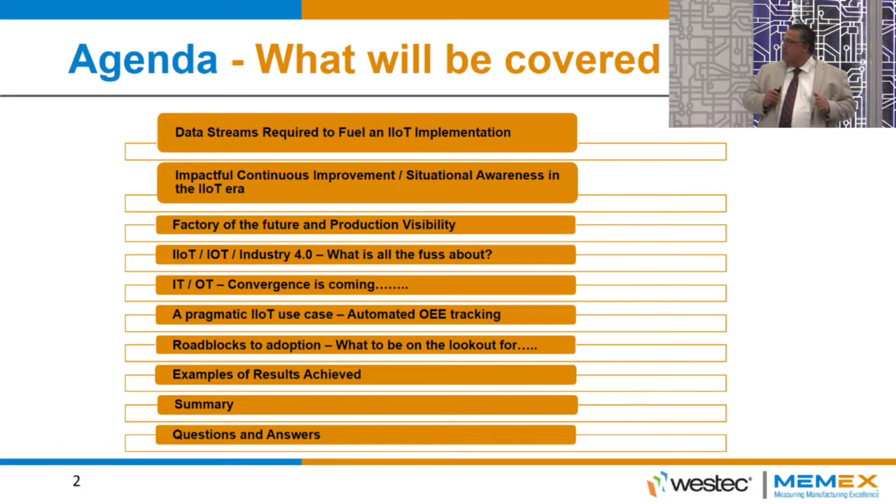This is what we're going to cover today. We're going to cover data streams required to fuel an IIoT implementation. We're going to cover impactful continuous improvement. We're going to talk about the factory of the future, IoT, what's all the fuss about, some convergence between IT and OT that has to happen. We're going to talk about some pragmatic use cases, automated OEE tracking, roadblocks to adoption, some examples of benefits, a summary, and then the Q&A at the end. So with that, let's get started.

So data streams required to fuel an IoT implementation. So the drive towards connectivity. None of this happens without having our assets on our factory floor connected. Okay, we need to pull the data out. We're big proponents of MTConnect. For those of you that saw Neil's presentation, he went into a great amount of detail. I'm not going to do that. Just suffice to say that we're huge supporters of MTConnect and have been since 2010.

So we have a product called the AX760, and it essentially turns that machine into a web server and speaks MTConnect. So it's essentially an Ethernet connectivity device, and it will go into machines that presently, in most cases, don't have an Ethernet connection, or if they do, they speak some proprietary protocol. So it saves us a lot of time and effort, and it actually lowers the barrier to entry for our customers.

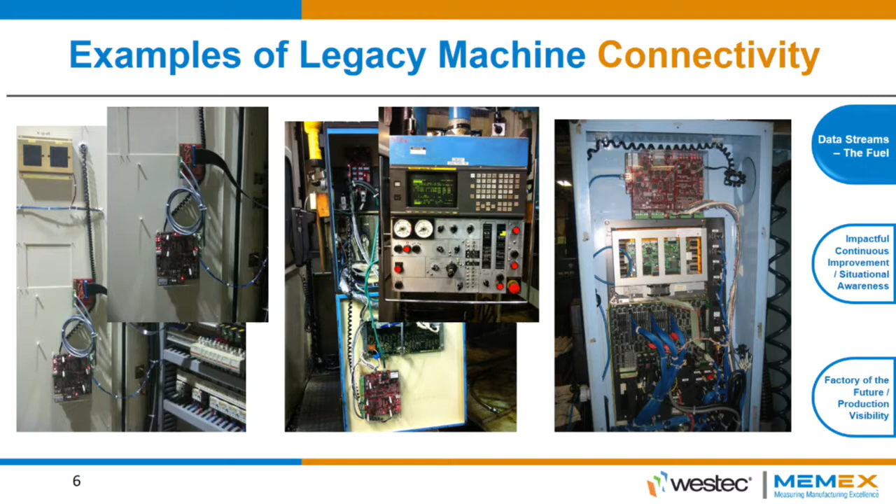So when we look at the data required to fuel an IoT implementation, there's really the confluence of three data streams. So we have data from the operator. This is an often overlooked but very important data stream, because the operator is essentially an important piece of the puzzle with respect to the productivity of the factory. The operator can influence the productivity of the factory.

It also can improve the productivity of the factory by giving us information that we currently don't have, like the machine's not running, and it's not running because the operator doesn't have the tooling to run it, or doesn't have the dunnage to put the finished parts in, or things of that nature. We can take that data back. We can actually fuel our continuous improvement initiatives with real-time data.

The second piece of data that's important is our business system data integration. So we want to be able to take the production schedule to and from ERP, take the production schedule from ERP, drive it down on the factory floor, have the operational management team use that schedule, and that schedule can change many times over the course of a day in some cases, but also be able to feed that data back up into ERP to do things like drive inventory and procurement directly.

So essentially what we have is a shop floor to top floor communications loop that's all done in real time without human intervention. And the third one we talked about was the machine data.

If we don't have these, our traditional approach, which is operator-centric all by itself, we get essentially reactive information, but we're generating lagging metrics. So our metrics are not in real time. An example of that would be companies that write, I was down for 10 minutes in setup, and I was down for 15 minutes in feed hold or whatever, and then aggregating that into a spreadsheet and firing it out to management the next day. That's a real lagging metric. We're having a production meeting the next day about something that happened yesterday.

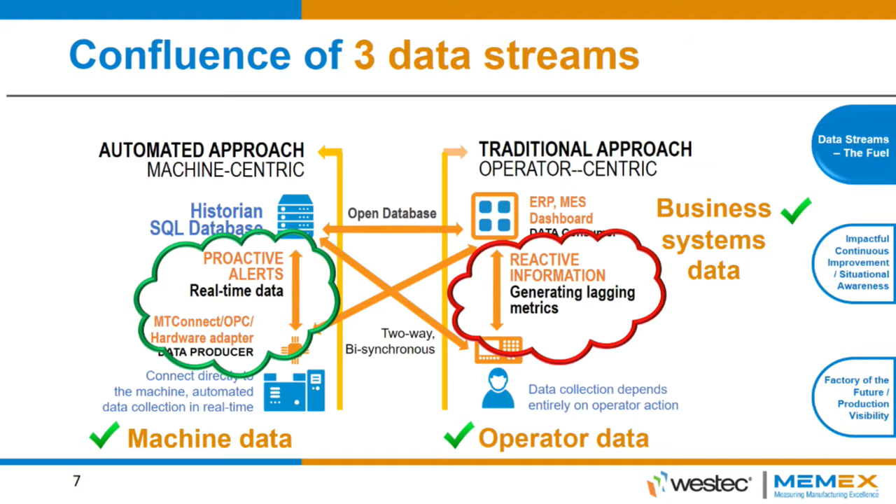When you look at what happens in most manufacturing plants, three things constantly change: people, product, and equipment. And so any one of those three variables can actually upset that productivity number from the previous day, and the cycle repeats itself every other day. So when we have real-time information, we can do things like proactive alerts. We can actually see what's going on in real time. We can action on that data. We can bring resources forward to solve a particular issue. We can drive our continuous improvement initiatives, which I'll get to in a future section here.

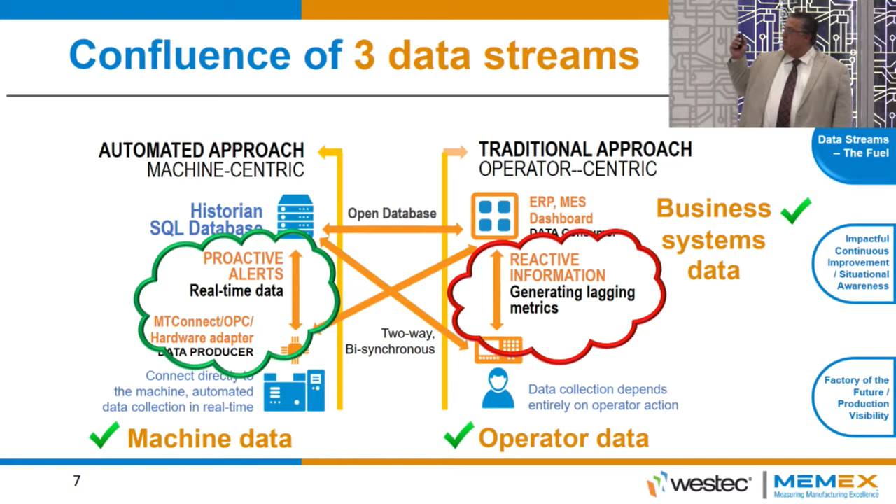But essentially when we go from reactive to proactive, when we take these three data streams in real time and actually display them. We talk about data-driven manufacturing and how it comes alive. So we obviously need to get real-time data from the factory equipment and the people that operate it. That's absolutely key. If we don't have that, we're not doing IIoT on the factory floor. We need the production schedule. We need to be able to go back and forth between ERP. That's also key to the factory of the future.

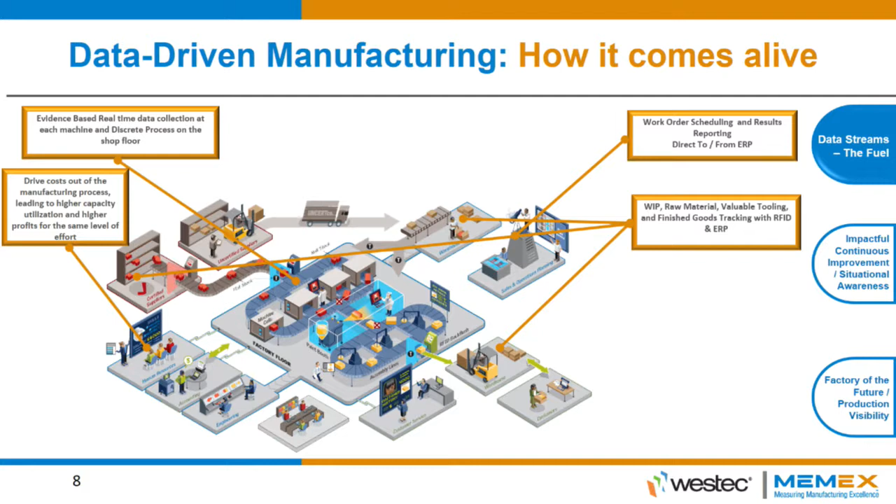If we really want to get elegant here, we can do things like use RFID on our high-value tooling or our work in progress, so we can know where to send the fork truck driver or where to send the person who's doing the setup to know where the tooling carts are and things of that nature. And we do have customers that do this. The whole purpose of this is to drive costs out of the enterprise so we can actually become more efficient. And on average our internal rate of return is 300%, or a 4-month payback. And we've done this 150 times with 150 different customers, some of them multiple plants, geographically located around the globe.

This whole idea is to fuel a continuous improvement, a real-time continuous improvement initiative, so that we're not doing a Kaizen event where we end up collecting data for a day or a day and a half, and then we make a process change, and then we do another half a day or a day's worth of data collection to see whether it was negative, neutral, or positive. We can actually just run reports right out of the system and pick the improvement areas that we want that give us the highest value of return for effort expended.

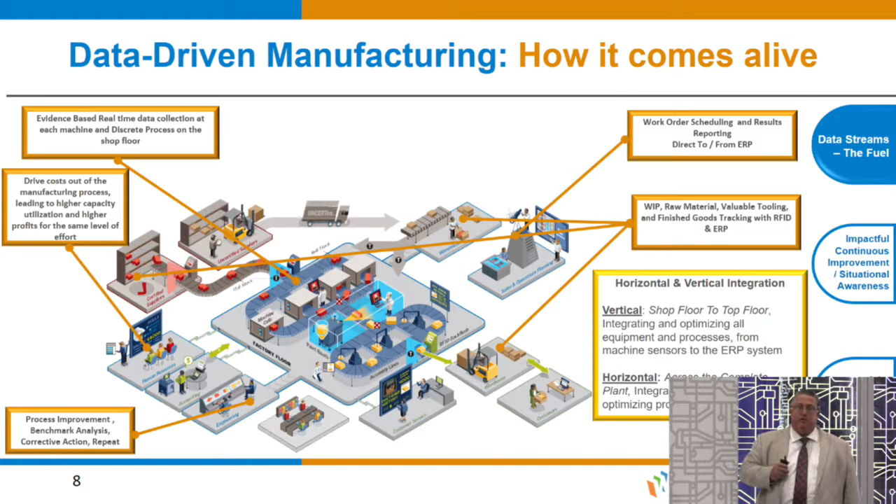And then we can have horizontal and vertical integration, so we can actually have our trusted suppliers be part of our supply chain, actually have visibility on what's coming up. So we have these pieces of landing gear that have to go out for surface treatment, or we have this particular batch of bearing races that have to go out for heat treatment. We can actually give them access to the system in a trusted way and have them see so they can plan their production schedule to meet our requirements.

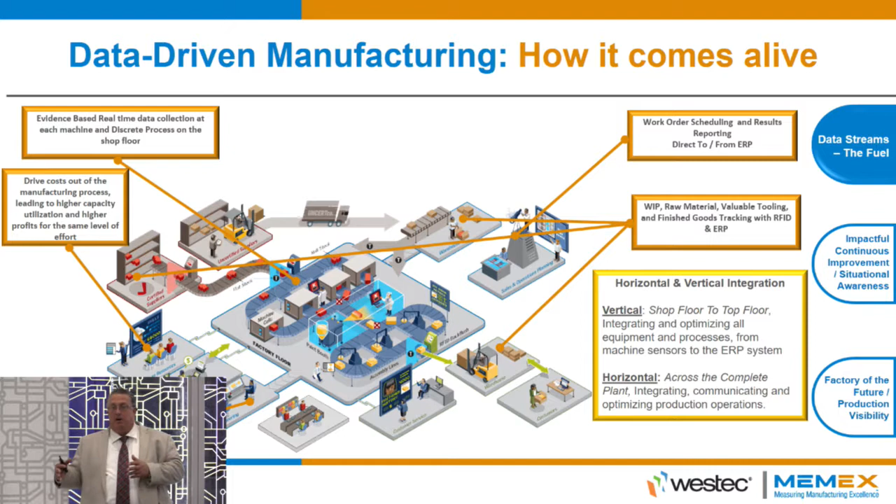What does impactful continuous improvement really mean? So everybody that's doing continuous improvement initiatives wants to do all of these things. They want better root cause analysis, they want to improve quality, they want to improve uptime. Obviously, on-time delivery is key. Real-time tracking of OEE is the business use case that I'm going to focus on, but there are many business use cases once you get your factory connected. Things like total productive maintenance, things like big data and analytics to do trending and when a spindle bearing is going to fail and things of that nature.

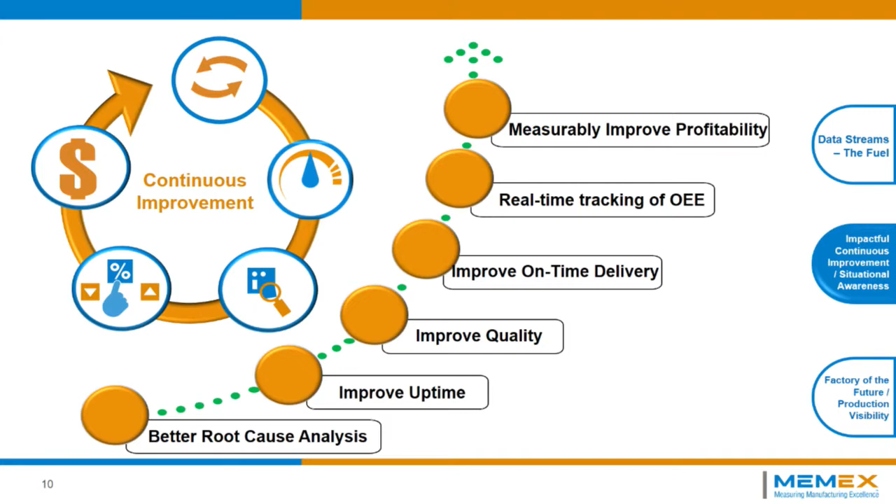Once we have these machines properly connected and we're actually streaming the data into the application, we can actually do a lot of really cool business use cases, and ultimately return on investment is dramatically improved. And obviously we want to measurably improve our productivity and ultimately our profitability. And I'll go through a couple of examples of that in a minute.

Now, here's what we want to reduce. We want to identify bottlenecks faster. We obviously want to reduce unplanned downtime. That's a key. Setup and changeover times are a big one. I mean, SMED was invented by Toyota. It was single-minute exchange of die. We want to get those setup times down as low as possible.

We'll leverage our resources, minimize unproductive labor. Obviously everybody wants to do that because you're paying the labor anyway, so we might as well have them do more productive tasks. Eliminate manual data entry and reduce costs and waste.

If we have the circle of continuous improvement that's driven by real-time data, all of these things are possible. We can have all the uptick of the previous slide, and we can reduce all of these things. The combination of those two directions moving opposite to each other actually dramatically increases the profitability of companies.

We've taken companies from 30 to 35% utilization to 80 or 85% utilization. When you think about that for a minute, that's like having somebody have another factory and a half of capacity that they didn't know they had.

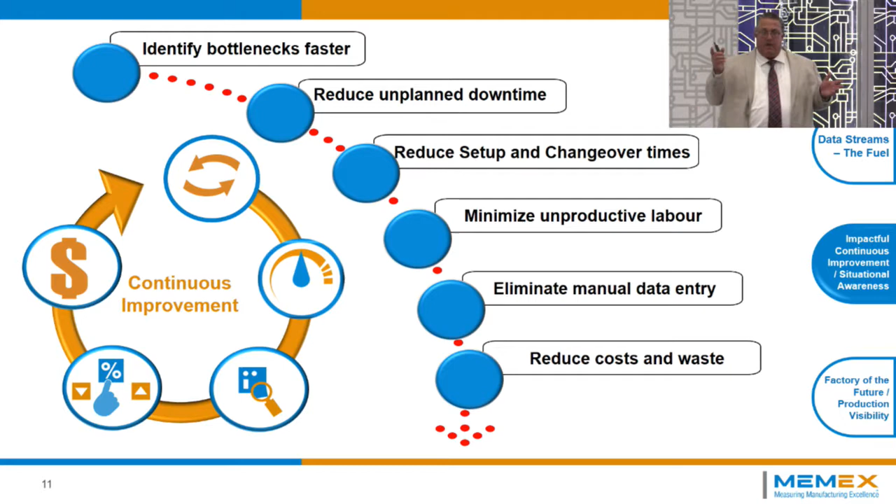The average answer that I get when we ask customers where do you think your efficiency is, where do you think your capacity utilization is, the answer I get is about 60 to 65%. The actual number, on over 150 times we've done this, is sub 35. So there's a perception reality disconnect between I think I'm twice as efficient as I actually am.

The good news though is we can show exactly with real-time objective data where to go and get this lost downtime and this lost productivity.

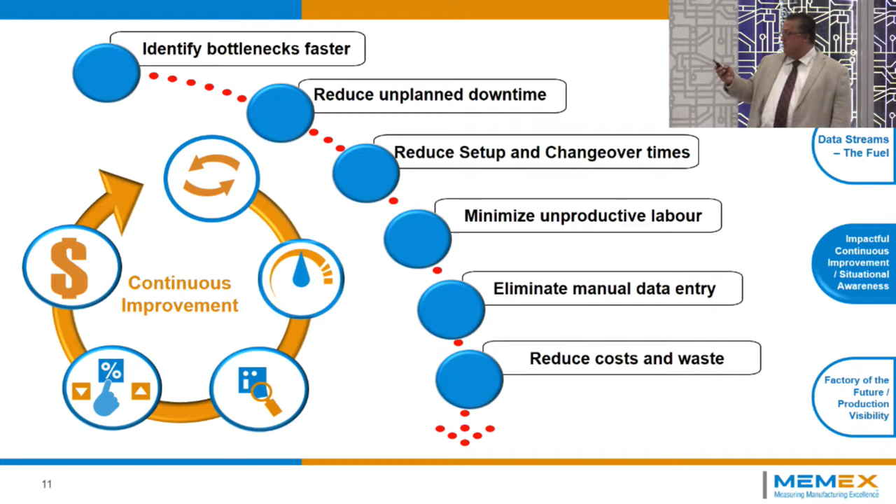Benefits of impactful continuous improvement. Obviously we're going to have daily team meetings with real data. Remember I gave you this scenario where we had meetings with data that was from yesterday, and it was latent. Now we can print reports out half an hour before our continuous improvement meetings for exactly what happened.

We can have meetings in the afternoon from something that happened in the morning. We don't have to aggregate all this data anymore, it's available to us. This is a concept that I like to bring to people's attention.

We call support the internal customer, where the operator is the internal customer. And if we can bring everything that the operator needs to be efficient - things like tooling, dunnage, emptying a chip bin, coolant, if you're using CNC machining as the manufacturing genre we're talking about, but you could extend that to anything else, packaging or whatever.

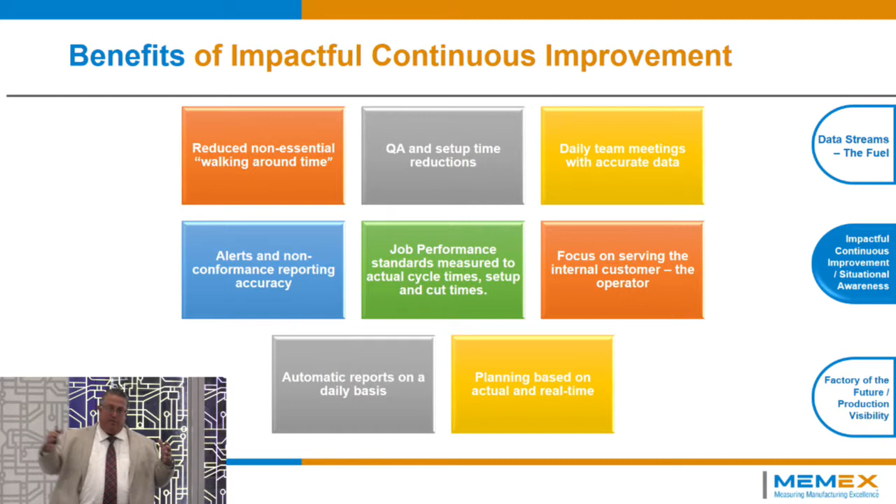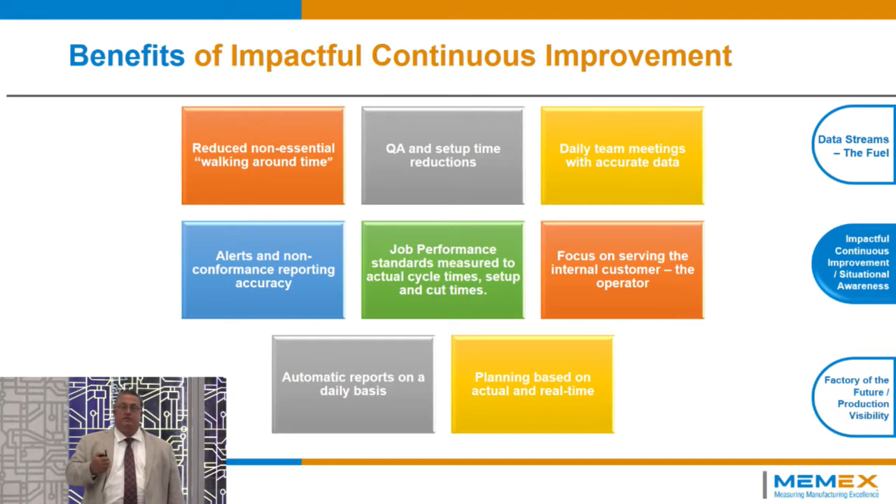When we can have the operator hit one button and say 'I need this' from a very simple to use operator terminal, what we've done is we've taken that person from a reactive to a proactive role, but we've also given them the ability to be part of the solution, rather than just simply pointing out that there's an issue.

The ones that we do take on, we want to make sure we maximize the availability of those resources in order to affect change and increase profitability.

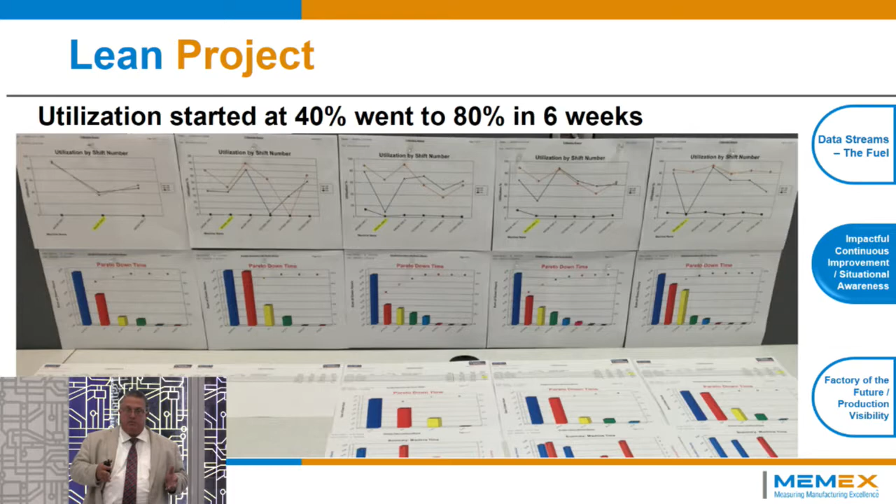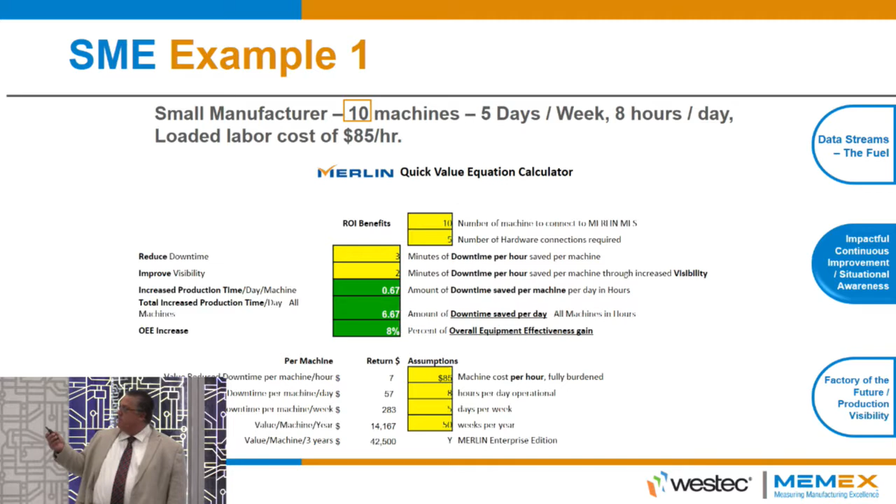I'll give you a couple of quick examples here. These are examples with a small and medium enterprise. So we'll simply take 10 machines over 5 days, 8 hours a day, and a loaded labor cost of $85 an hour. If we look at half of those machines being hardware connected and the other half being essentially plug and play MT Connect or OPC connected, this is simply done for the costing of the project.

We're going to concentrate on a really small increase in efficiency. So we're going to talk about 3 minutes of downtime reduced per machine per hour, and we're going to pick up 2 minutes by increasing the visibility of the process. That's only an 8% increase in OEE.

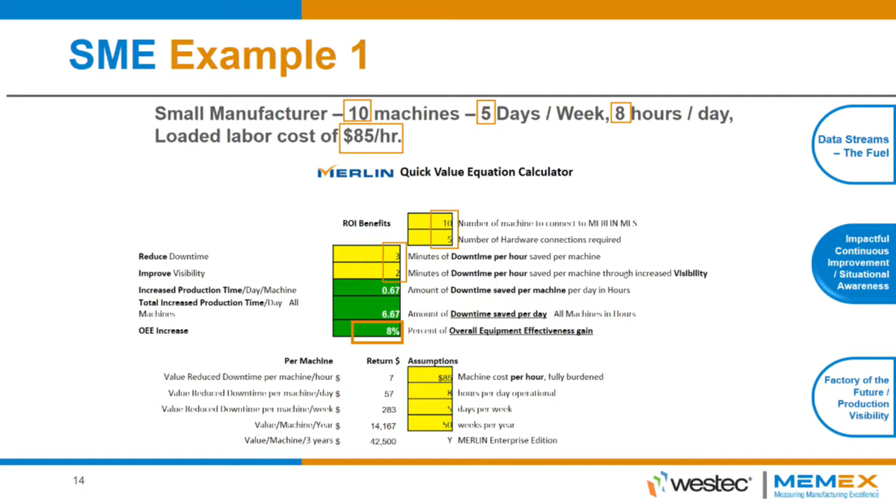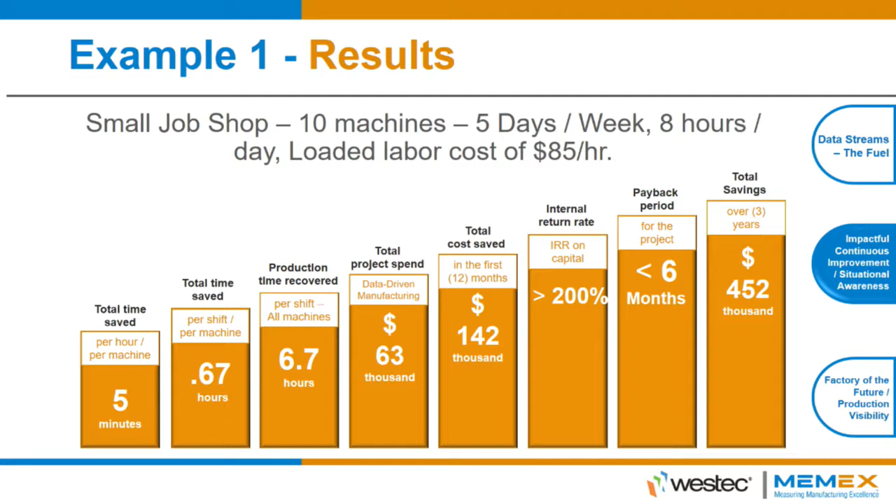Well, we spent approximately $63,000 on this project, but we gave back the company $142,000 in the first 12 months - just a little over a 200% internal return rate. But over the 3-year lifespan of this, we actually generated $452,000 of additional accretive income.

I'll look at the same example again, but I'll actually double it. So we'll have 3 times the amount of machines, but we'll also run 2 shifts a day instead of just 1 shift a day. So we're still talking about 16 hours, $85 an hour.

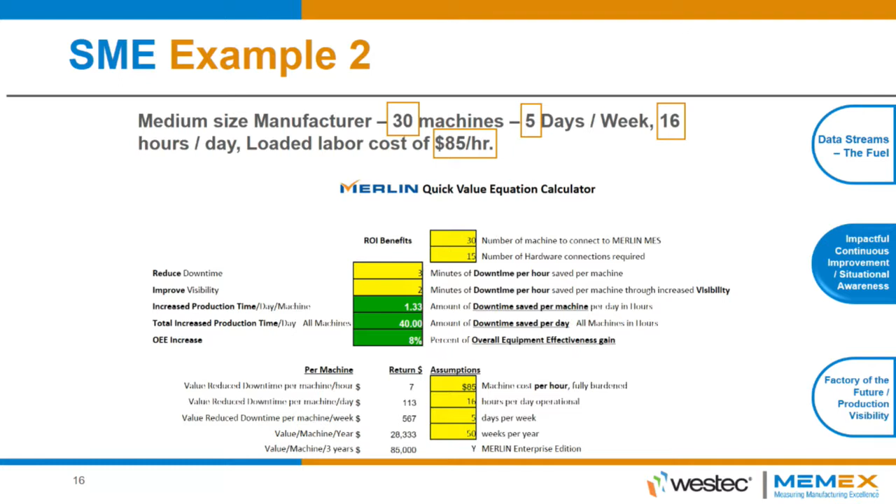We've got 30 machines, 15 of them are hardware connected. Again, the same small increase, 3 minutes per machine per hour and 2 minutes per machine per hour. Same 8% OEE number. But here's the numbers.

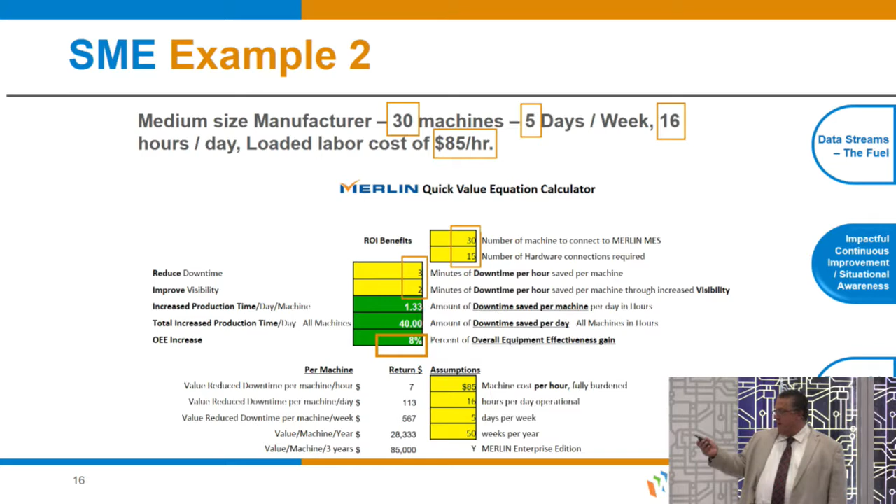We spent $150,000 of capital on a project like this, but we saved $850,000, and over the span of 3 years, we generated $2.5 million more of income.

All right, these are actual numbers. We have a return on investment calculator. We've done this 150 times, and in every single case, somewhere between 200 and 400% internal return rate of capital is the average. We have customers that even have more than that, but that's the average internal return rate.

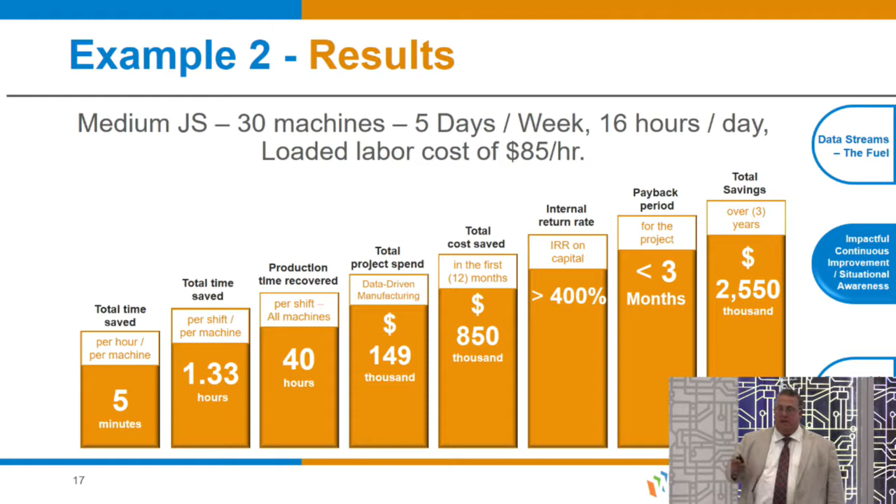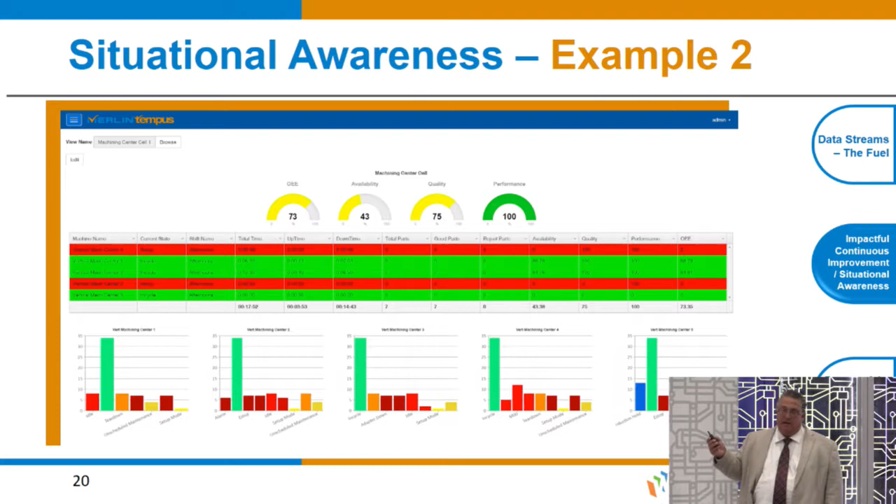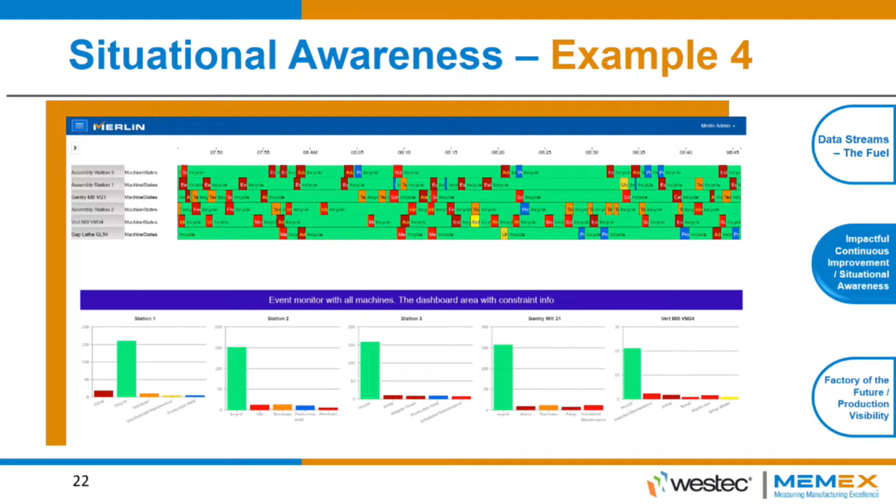So what does situational awareness look like in the IIoT era? Well, it could look like this, or that. These are all examples of having real-time data available to the operational management team to give them a completely different situational awareness tool to manage their factory floor and operations.

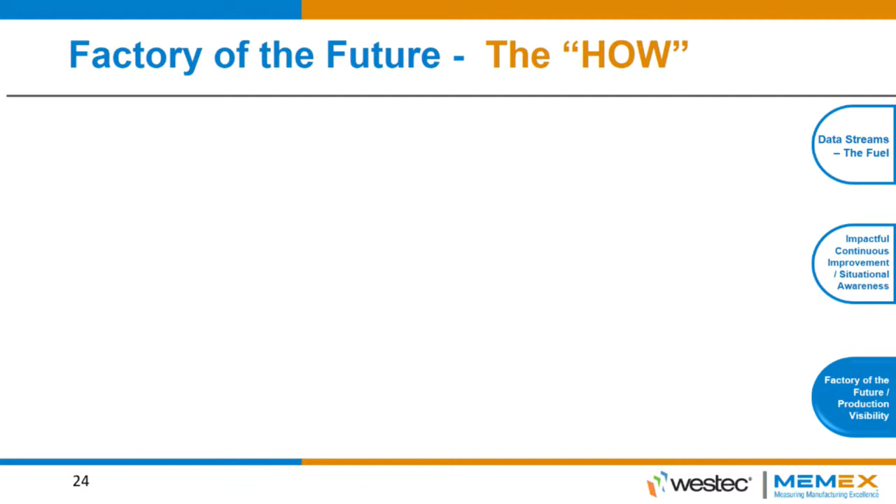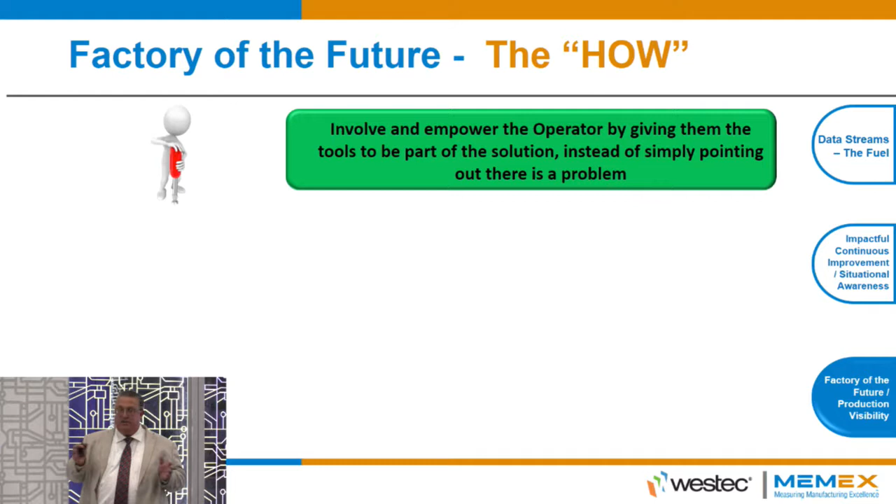What's the factory of the future and the value of production visibility? When we talk about that, I'm a huge proponent of involving the operator. The operator is key both in the selection process and in the implementation process, and ultimately the execution process after we go down the road of implementation. We absolutely have to have the operator be part of this, otherwise the entire system gets looked at like Big Brother, and that changes the entire culture of the organization. Culture is key to successful adoption of this technology and ultimately reaping the benefits that are promised.

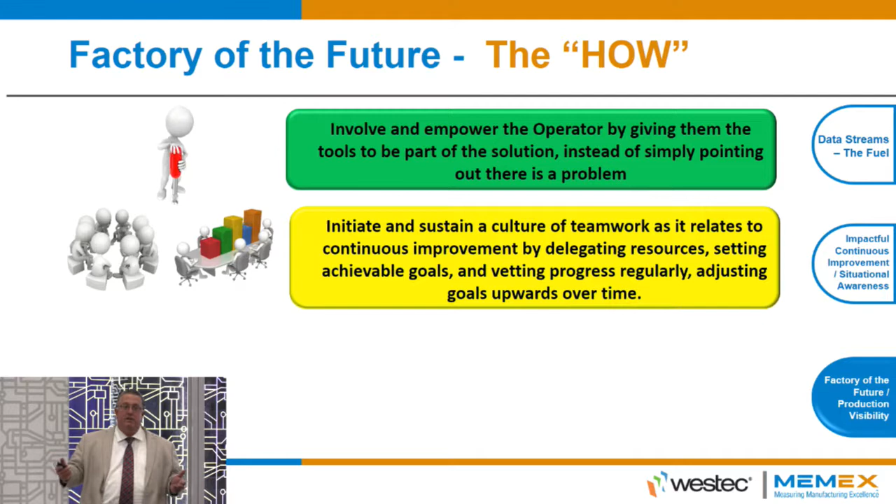Teamwork. Because we have one version of the truth now, one set of data that's objective, there's no subjectivity involved, then we can have people in all the different departments that require this, whether it be quality or production or operations, scheduling, maintenance, whatever. We all have one version of the truth now, so we can all rally around one set of data points that's accurate. There's no more finger pointing, no more saying this is a production related issue or operations related issue or maintenance related issue. It is an issue. We know what the issue is, and now we can task as a group to solve it.

So what we've seen is a lot of additional teamwork as a result of just getting rid of the infighting, getting rid of the finger pointing.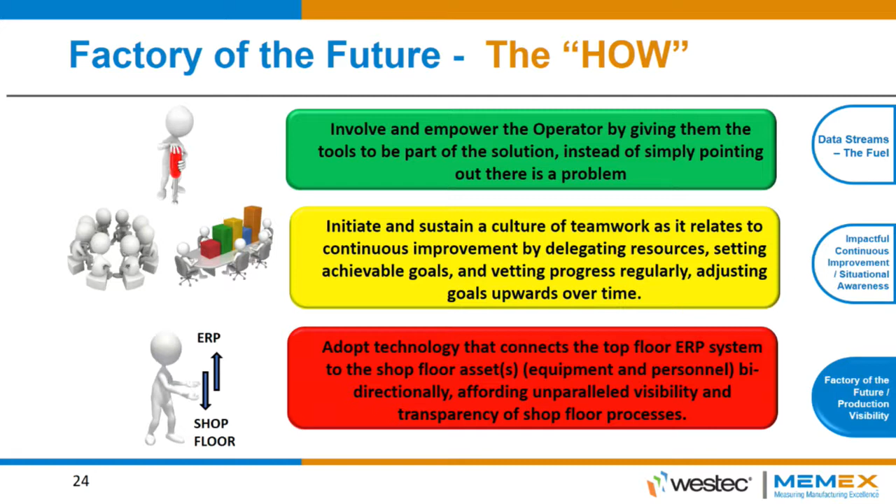And we've talked about connecting the shop floor to the top floor, connecting our ERP system. We have a lot of data that's trapped in ERP, but it's not actionable, because the traditional way work orders are dispatched today, without a system to accept them on the factory floor, is go make this and tell me when you're done. When a customer calls in and asks where's my work order, where's my product, and you can't answer that, you have to put the phone down and say I'll call you back, or respond by email, and go find that work order to figure out where it is in the operation. You can actually give the customer a much more pragmatic answer if you can look at it on one dashboard.

The when: well, as I said, on average, a 10 to 50% sustainable productivity increase. The investment's measured in months. Again, I haven't done this 150 times, but we have the benefit of some empirical data.

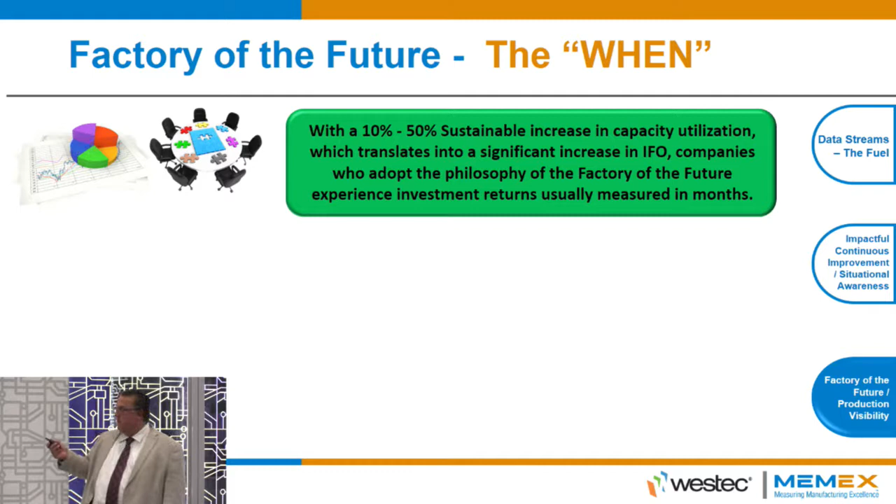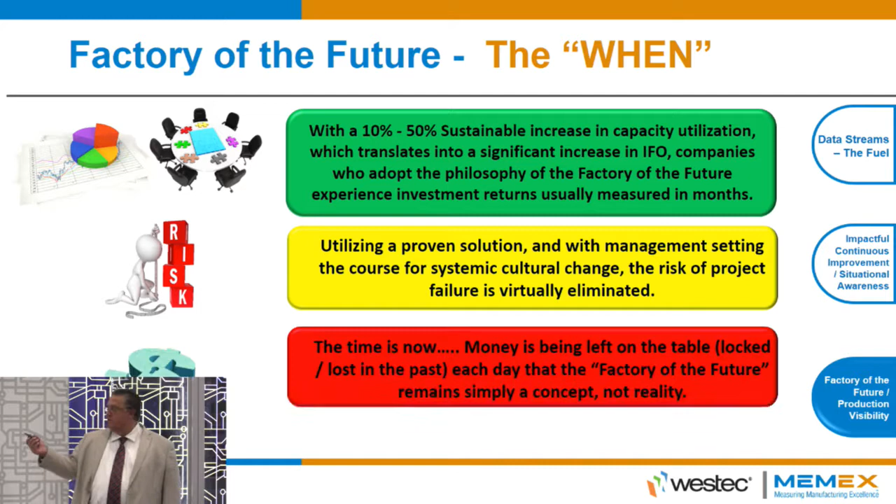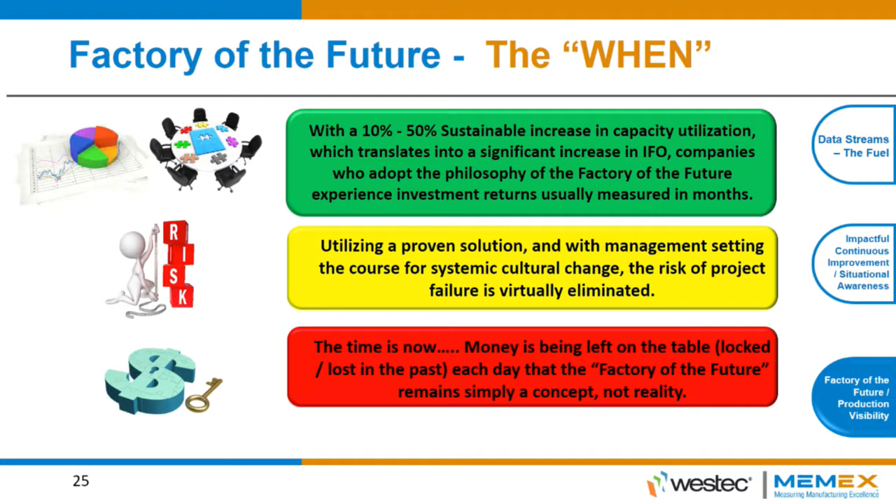Utilizing a proven solution with management setting the course for the culture change, which is really important, reduces the risk of adopting this technology. And I always say the time is now, because if you believe what I said about a 300% internal rate of return on capital, or a 4-month payback, if we started that on the first day of your fiscal year, we would have given the capital back to the company 3 times over the first 12 months.

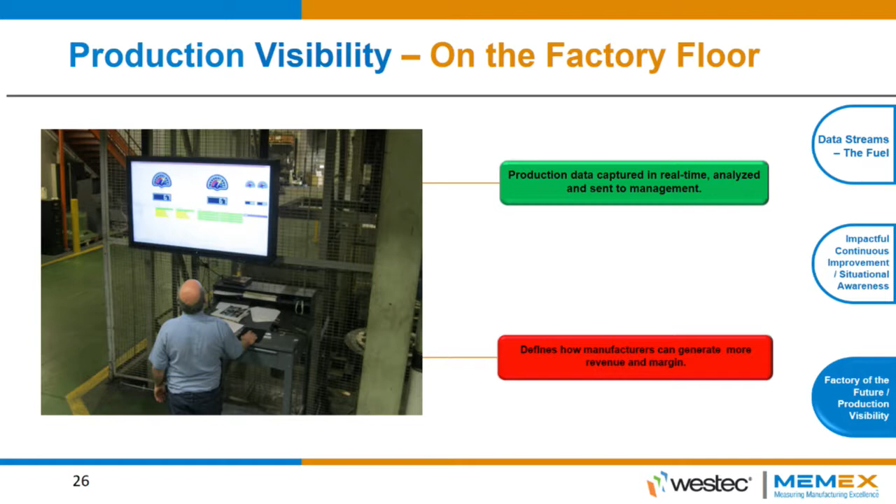So production visibility on the factory floor, on average, we see a 6 to 10% productivity increase just by putting up andon screens, without running a single report. You don't have to run a report, and you'll get somewhere between 6 and 10% productivity increase, because everybody on the factory floor now has complete transparency and visibility about their area and how they're affecting productivity, how they're utilizing the equipment.

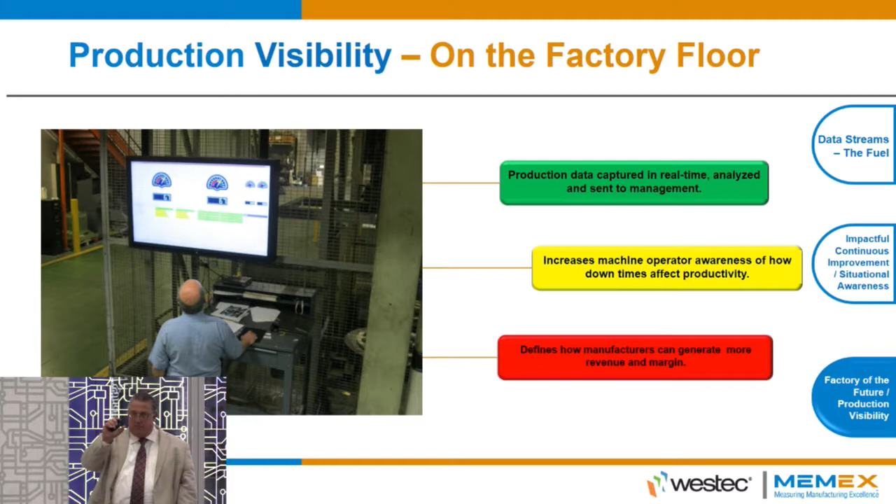And then increased machine operator awareness, and how downtimes affect productivity. That's a key one, because you can watch this on a very simple speedometer to see what's going on right now. If I ran this job before at 65% efficiency, and right now it's at 55% efficiency, I have a way to figure out where that other 10% is and fix it before the end of the day.

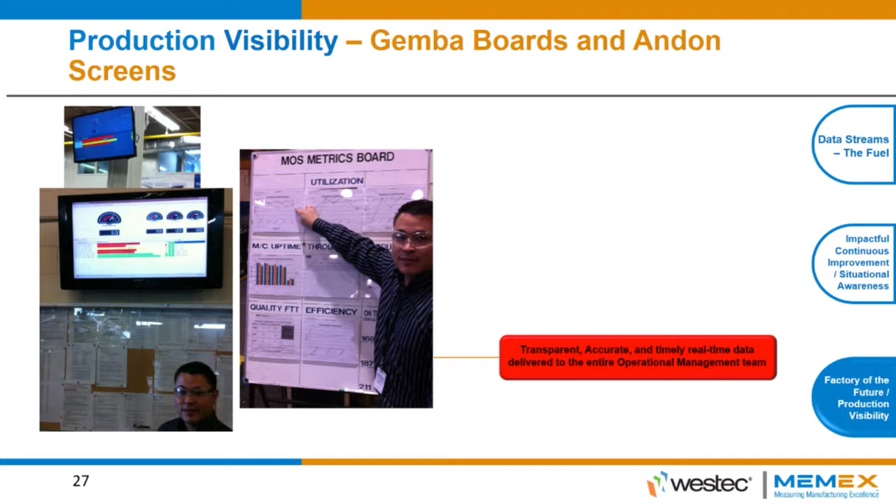Gemba boards and andon screens. We see a lot of our customers run electronic Gemba boards where there's no more paper being printed out. There's just reports generated on large screens that the entire operational management team rallies around in the morning, gets their instructions for the day, and then goes and executes, and can come back and see what's going on throughout the day. So it gives everybody in the entire factory a different situational awareness capability, and huge transparency when everybody can see what's going on.

And what it's done for this particular company is take their OEE from 40% to 82%. That took about 9 months.

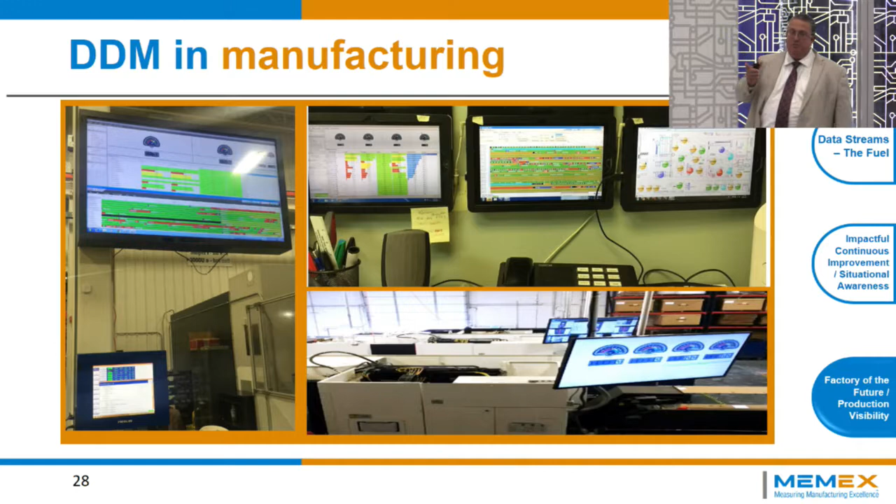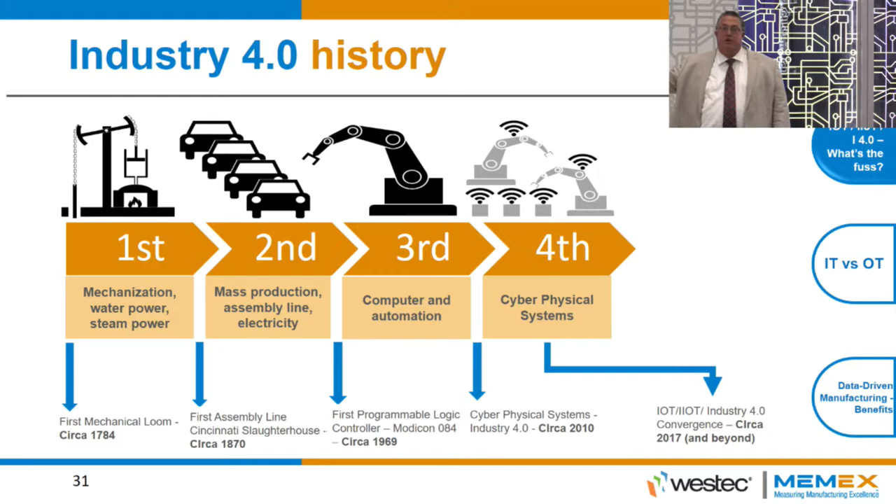A little bit about Industry 4.0 - for most people, a nebulous concept. How do I monetize Industry 4.0? What is Industry 4.0? I'm not going to get into the first two industrial revolutions because I wasn't here. I started around the 3rd. But where we are right now is we're trying to converge three ideas into one common theme, which I'll get to in a subsequent slide.

So when you talk about the industrial Internet of Things, we're talking about data from the equipment, data to and from ERP, and data from an operator portal. We're actually leveraging these three data streams together, and that's another business use case of the IIoT.

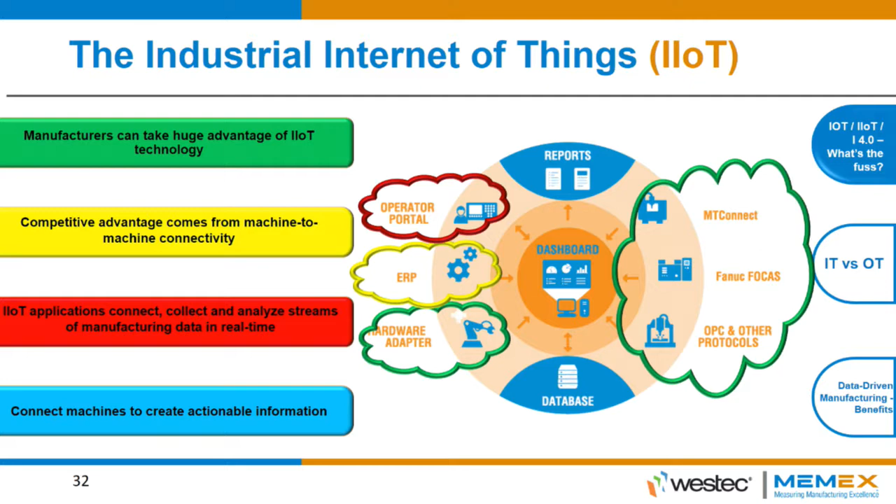These are examples of IIoT in manufacturing. There's probably 100 examples of where you can apply IoT in manufacturing. I'm going to concentrate on OEE because that's what we do. But there's also TPM, predictive analytics, predictive maintenance - all kinds of things we can do with this data.

When we do it via MTConnect as an example, we can put in one set of infrastructure, one common set of infrastructure, and start plugging in different applications that consume the exact same data stream, but create a completely different business outcome. And they're not interdependent with each other, they're completely separate. It's just one data producing layer, many consumer layers.

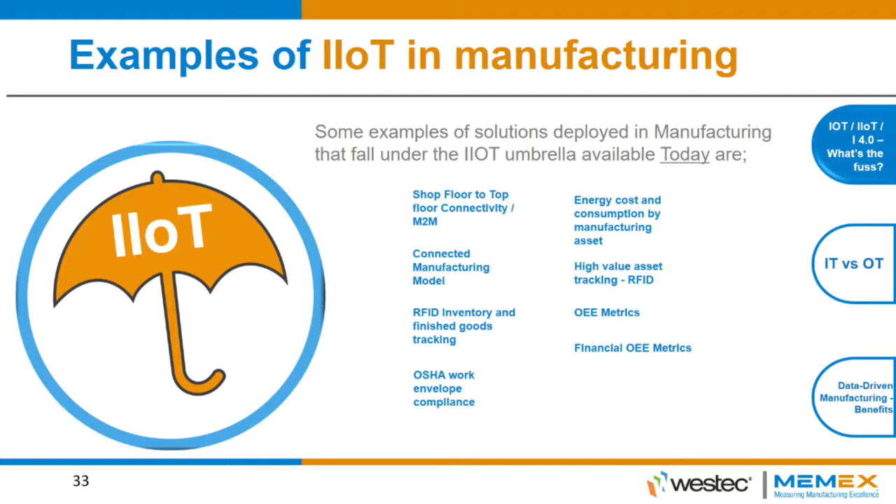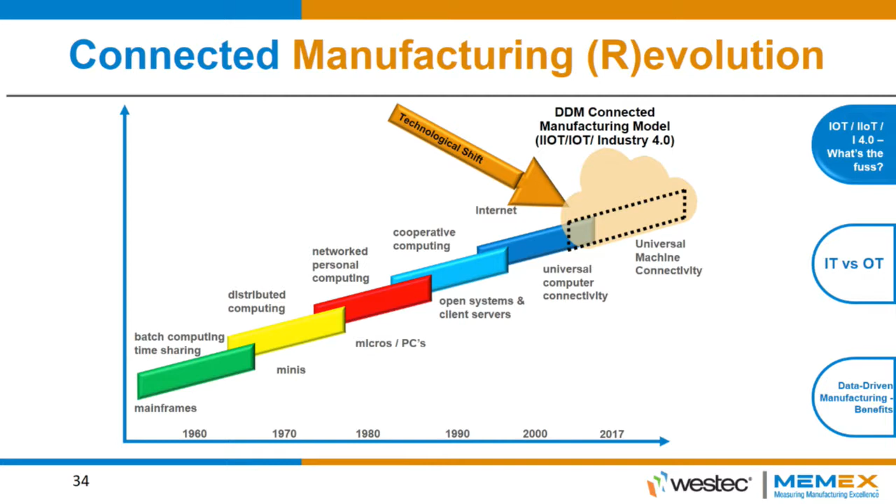So where we are right now in the connected manufacturing revolution is probably at what we call data-driven manufacturing, the connected manufacturing model with universal machine connectivity. That's not really that expensive - it's what we call a technological shift. It's from having all these disconnected assets, to now having all these assets, all this data flowing into one central server. What do I want to do with it? What business outcome do I want to take on?

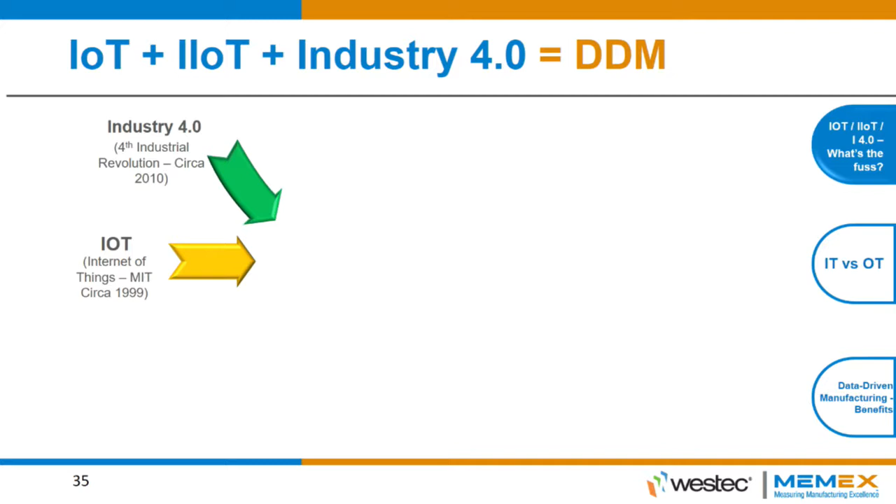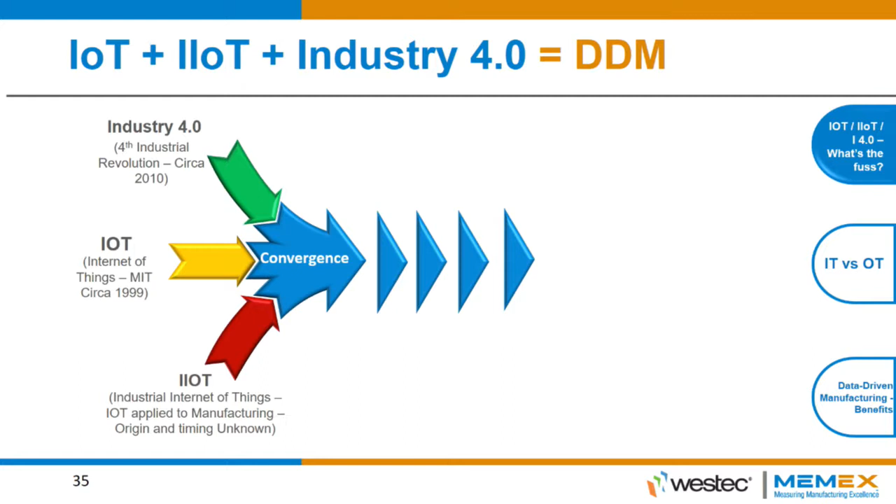So when you think about these three concepts, with IoT being coined by MIT around 1999 and Industry 4.0 around 2010 by the German government - I tried to find a stat on who actually came up with IIoT, Cisco or GE, around 2009-ish. But what I challenge people to do is think about a convergence of all three ideas. They're all kind of similar, but a little different, into one common idea with consolidated reporting, big data and analytics, corporate dashboards, all driven by real-time data.

We call this entire concept data-driven manufacturing, or DDM. It's like this industry didn't need another acronym, but we created one anyway - data-driven manufacturing. So it's interesting when I talk to people about IIoT, the question I get asked all the time is, how do I monetize an IoT strategy?

So why don't you think about it as just data-driven manufacturing, because actually what we're doing is we're driving the manufacturing process with data. That seems to be understood a lot better than simply Industry 4.0 or IIoT.

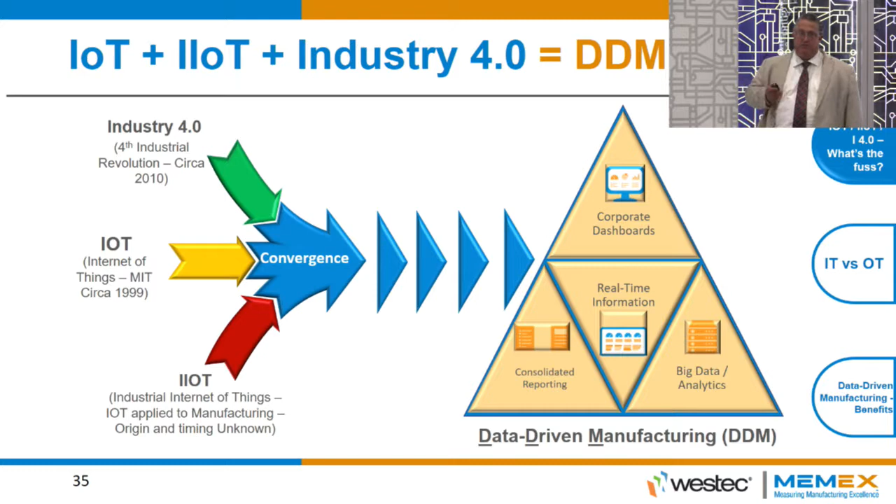I want to talk about some myths and reality here. From a myth perspective, with the advent of this technology in manufacturing, it's a theoretical construct with no practical application, or an unquantified capital expenditure with no quantifiable return on investment, or it's a highly technical deployment strategy where the path is unknown and the costs are unknown. And the last one I like the best: the myth is it's a magic bullet for every problem that manufacturing faces.

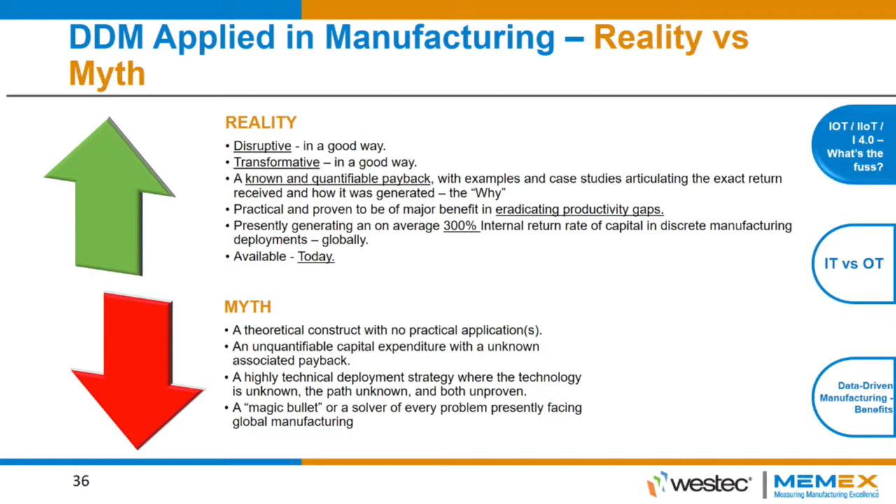The reality is that's not true. It's not a magic bullet for every problem. Let's talk about what it is, though. It's both transformative and disruptive, but both in a good way. It's a known and quantifiable payback. I gave you a couple of examples there, and I said that our average internal return rate was 300%, or a 4-month payback. And this technology, when applied in manufacturing, is practically proven to eradicate productivity gaps. An increase from 35% to 65% is the average example that I gave you.

Average internal return rate of 300%, and it's available today. So this isn't an idea anymore, this is reality. Instead of having done this 150 times, I think we've connected about 7,000 machines in total, which is a drop in the bucket for how many machines are available to be connected just here in North America.

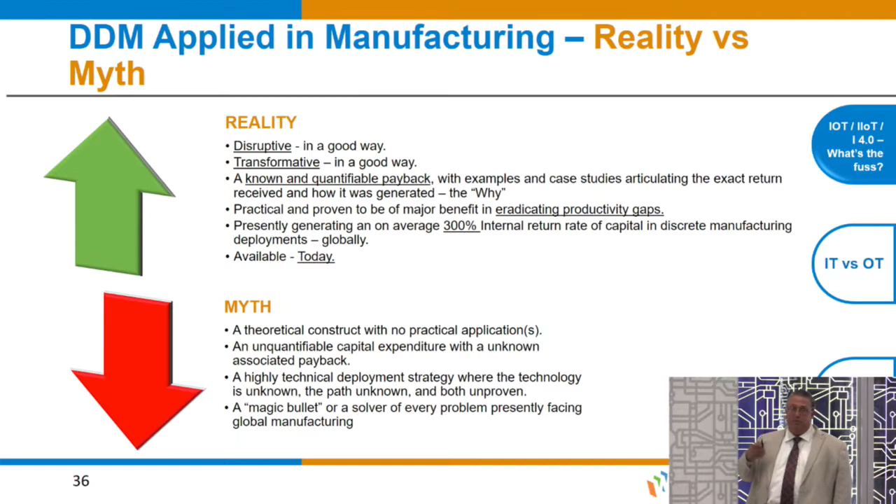When we talk about IT and OT, in order for these projects to be successful, we have to have a convergence of the two camps, because right now they're in very separate silos. So usually when OT comes to IT and says, I want to do something on the factory floor, I want to connect my assets, the first answer is no. I've been in meetings where that's happened, so then there's a network that's put out there that's completely separate from the other network, because they don't want to tie it together with their business systems. In order to take full advantage of this technology, that mindset has to change.

Good for Mazak to take a leadership role in this and actually come up with a smart box so that IT can finally embrace a device at the edge that they understand, same as what they have in the rack. They can take the same policy and procedure that they put on these large rack-mounted switches and apply them to this small, relatively inexpensive layer 3 switch.

So what does IT care about? Well, obviously, IT doesn't want the scope to never end and take up all their time and be one of these projects that never ends. They obviously care about physical risk and safety. That's kind of what they're there for: to make sure that we don't get malware, ransomware, or virus infections. And they don't want to support outdated or custom systems, because what happens eventually is OT just punts it over to IT, and IT is now stuck with this legacy system.

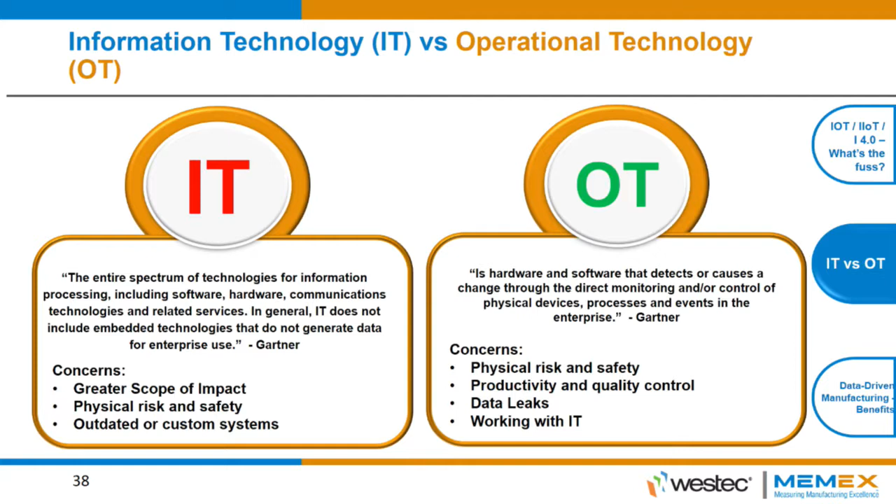What does OT care about? Well, they also care about physical risk and safety. Nobody knowingly wants to expose the company to bad things, right? So it's not a purposeful outcome, it's an unintended consequence. They care about productivity and quality control. Obviously, data leaks, especially when we're getting into sensitive manufacturing, whether it's defense or nuclear. And their number one concern is working with IT. We hear time and again from OT the complaints that IT is so difficult to work with, and on and on. This has to change.

So when you look at a typical deployment of this type of technology on the factory floor, and you look at what IT cares about, well, they care about the networks. Everywhere you see the red, there's a network. They care obviously about databases. They care about the ERP system for the most part, and any interface with any other applications across the network.

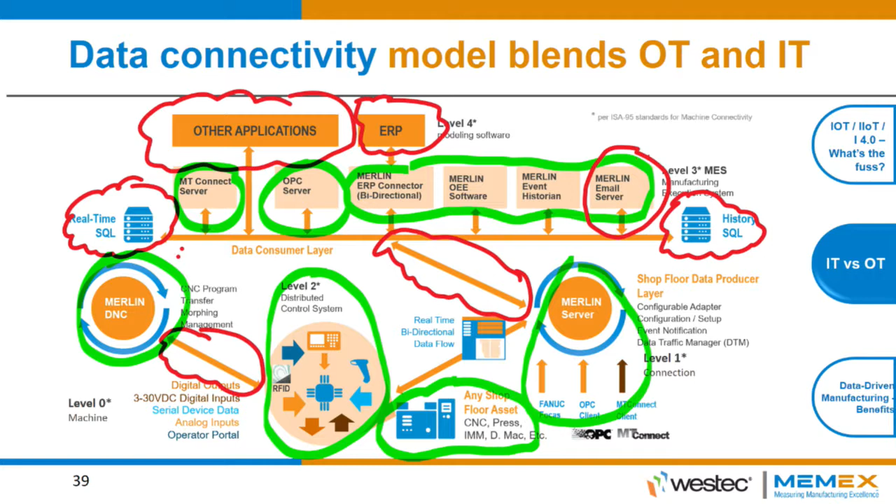What does OT care about? In this case, we're giving an example of transferring programs to and from a CNC machine via distributed numerical control. OT also cares about putting in a system to take data from the factory floor from the operator. There's a lot of overlap here. There's a lot of places where these circles intersect, where these two camps have to work together. So this has to happen.

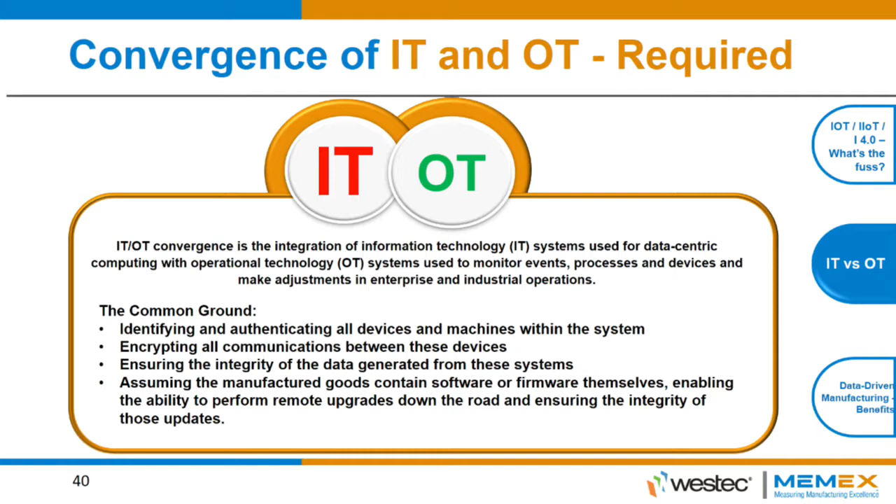We have to have convergence of IT and OT, where both understand that security is important and both understand that we can encrypt communications between machines, or between machines and databases, or between machines, databases, and even the cloud for that matter. And obviously ensuring the integrity of the data, and being able to actively support an implementation like this in a way that brings both camps together within the enterprise. This has to happen.

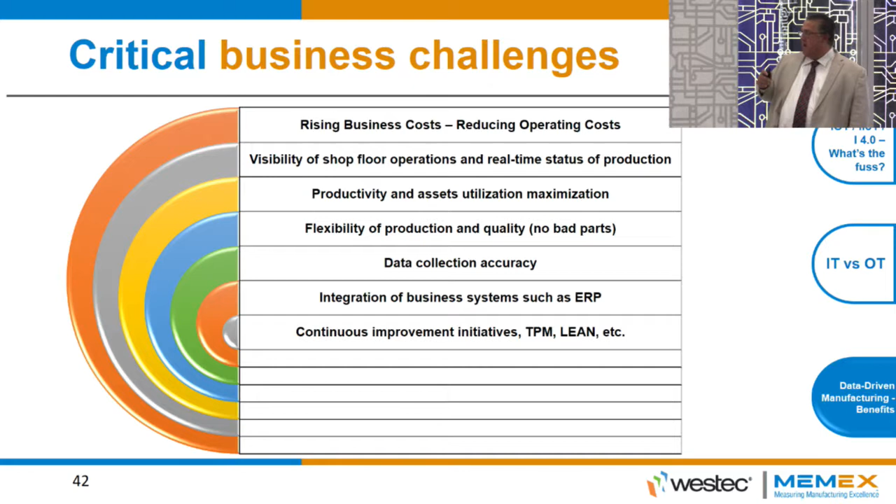So we look at benefits to explore. We're talking about overall equipment effectiveness. These are some of the critical business challenges that have been identified to us by our customers. We'll see rising business costs, as everybody will say that. Productivity and asset utilization maximization, data collection accuracy, and obviously continuous improvement initiatives are very important. I don't know a company out there today that isn't doing some form of continuous improvement, whether it's the Toyota production system or Hoshin Kanri, or there's probably 5 or 6 other ones, or Kaizen events. So that's very important, and they're critical business challenges to our customers.

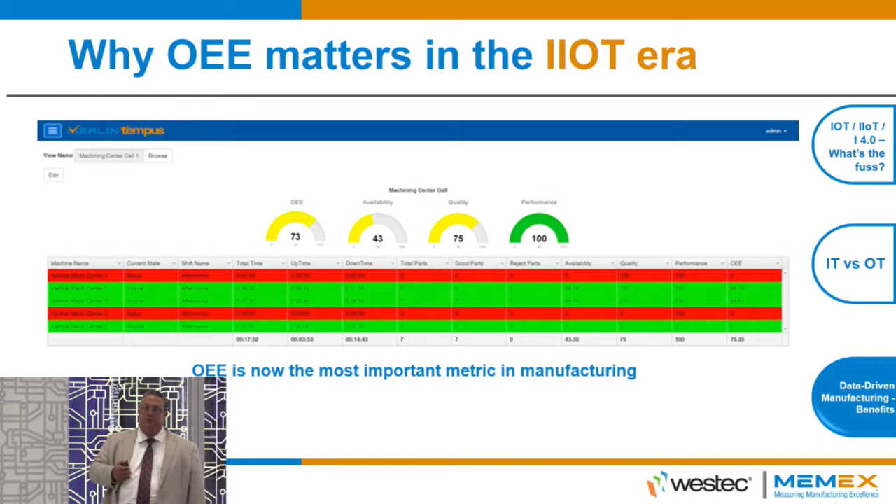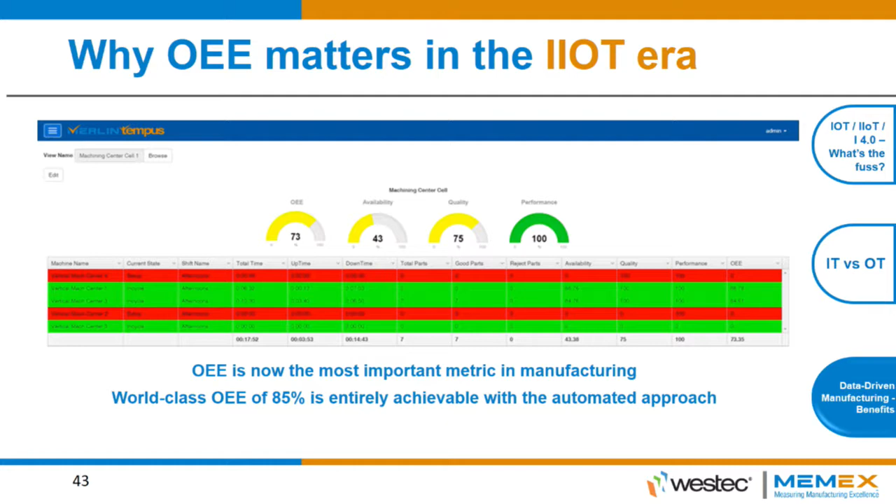Why does OEE matter in the IIoT era? Well, it's become one of the most important metrics in manufacturing, because for the first time we can actually quantify a process in the form of a number. So we can take availability times quality times performance, and we can calculate, distill the Six Sigma principles of waste down into one number. And world-class OEE is 85%, or 95% in each one of these 3 categories. And as I told you earlier, most people think they're 65, the actual number is 35. So there's a huge opportunity to leverage the value of the OEE calculation to increase the productivity of the average factory to world-class levels.

Again, availability times quality times performance. Availability is runtime divided by total time including downtime. That's an easy one, never more than 100%. Quality is good parts divided by total parts including rejects. Again, never more than 100%. The performance one's interesting because theoretically you could be twice as efficient. You could say my part takes 10 minutes to make, but I brought in some new tooling and I bought a new machine and now I cut that part in 5 minutes. So theoretically I'm 200% efficient. The reality is we should lower the product standard down to 5 minutes and do it again and again, and continue to lower that bar so that we're not patting ourselves on the back for a false number. And we really see this as the gold standard for measuring manufacturing excellence.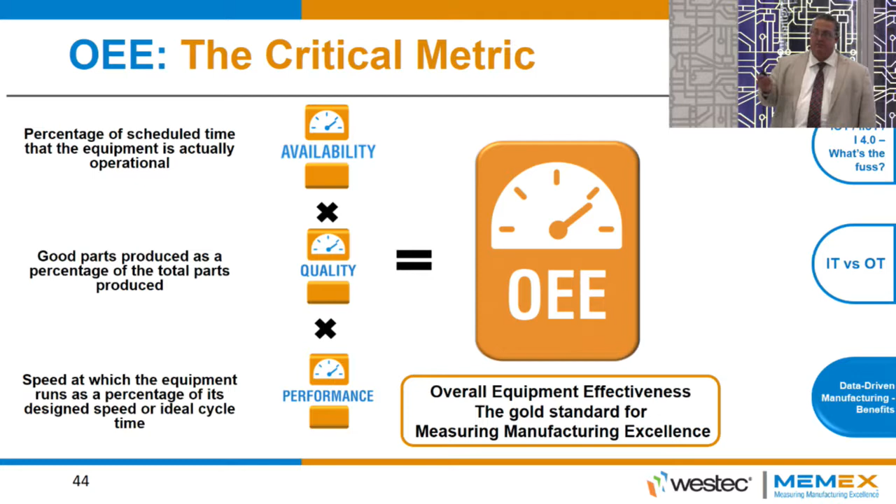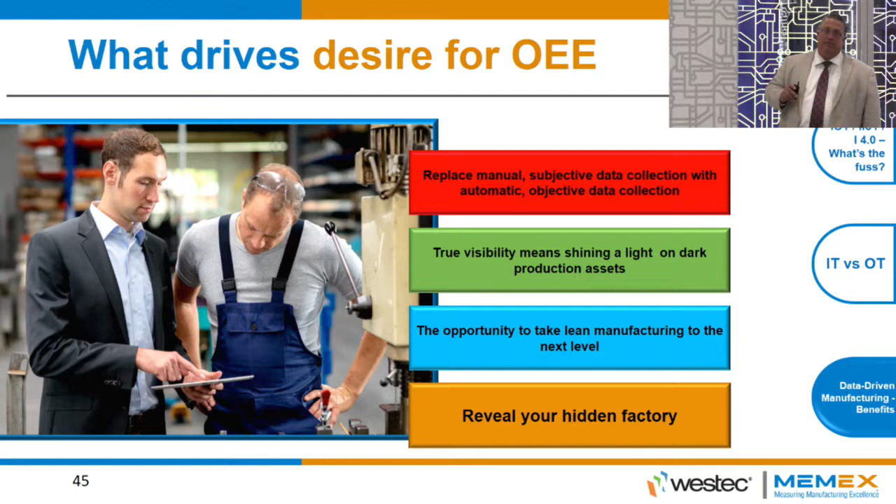What drives the desire for OEE? Well, I said earlier, we reduce or eliminate subjective data and replace it with objective data. That's key. We shine a light on dark assets, so we actually light up the factory, so now we see what's going on across our entire factory operation. We talked about impactful continuous improvement, so driving our lean initiatives with real-time data. And we call the last concept, reveal the hidden factory. We've had companies that didn't know what to do, were outsourcing work all the time. They couldn't make enough parts. They would take on more work and they had to outsource that work. That's actually not very profitable. So when they were able to reshore this capacity back inside the 4 walls, there's huge benefits from a profitability perspective.

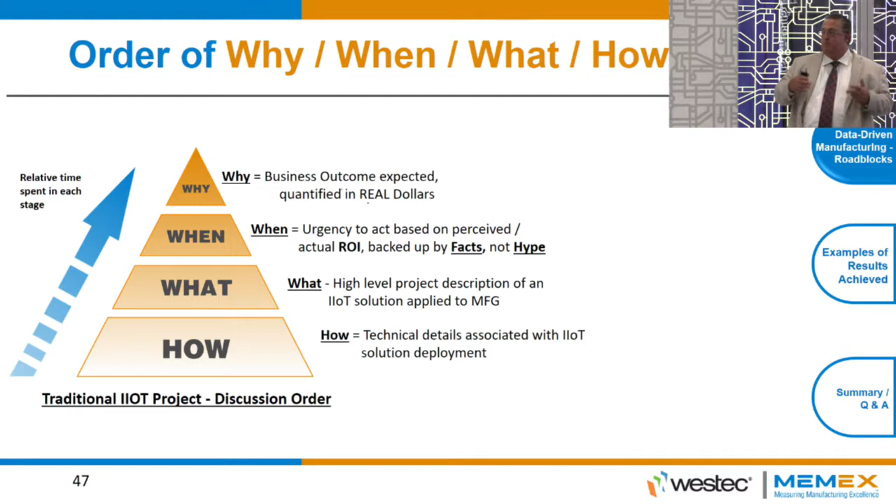Some of the roadblocks to look out for. Well, when we used to go to market with this technology, we used to talk about the how all the time. We talked about the gigabits and the this and the that, and all the inner workings of the technology, communication protocols, all that stuff. Then we had a little bit of time on the what, some on the when, and the why, the business outcome, the real reason to want to do this, would be the last thing we would talk about. So what I challenge our sales guys to do now is to talk about the why first. When you go to buy a car, what does the salesman want to do? They want to put you in the driver's seat first, because they want you to envision yourself driving this car down the road. We do the same with the customers. We want to understand why you want to do this. What business problem are you trying to solve?

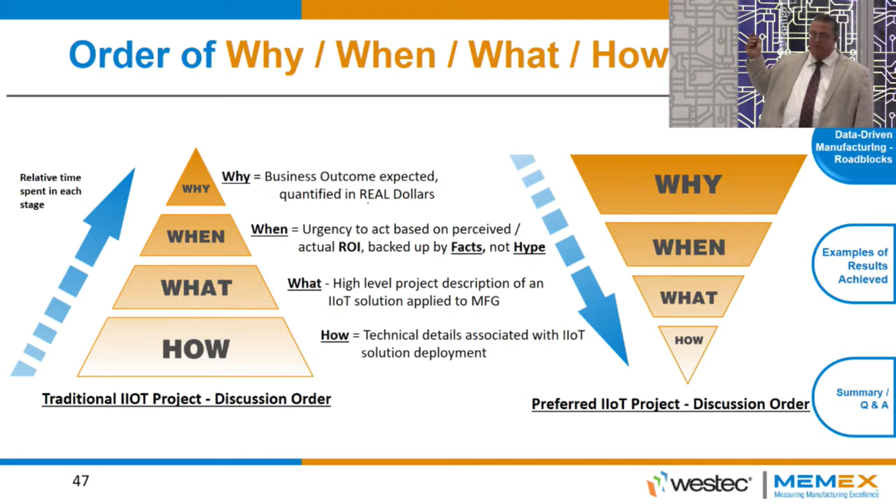And we bring our experience to bear, and a combination of those two things ends up in a solution that, again, generates about a 300% internal rate of return. We spend a little bit less time on the when, and the least amount of time now on the how. And that's important, because if the why is not understood, the how's irrelevant. We're never going to get a project funded because it's the fastest network or it's this or that. We're going to get it funded because we're going to give this capital back to the company, in some cases 3 times in the first 12 months.

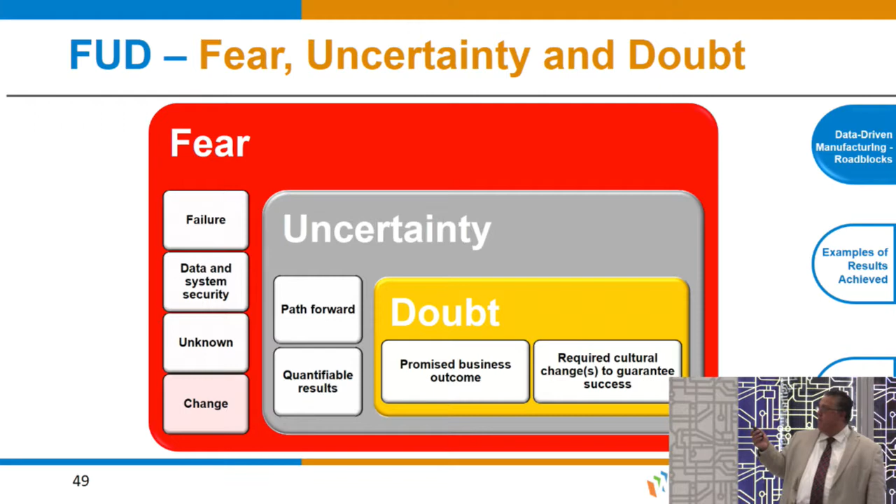I want to talk a little bit about fear, uncertainty, and doubt. So from a fear perspective, we have fear of failure, fear of the unknown, fear of change, and fear of data and system security. We have uncertainty around the path forward and the quantifiable results. And we have doubt about the promised business outcome and again, this culture change, our ability for our company to change and morph the culture to be able to adopt and accept this type of technology. These are all fear, uncertainty, and doubt that we see with our customer base, so you should be aware of it.

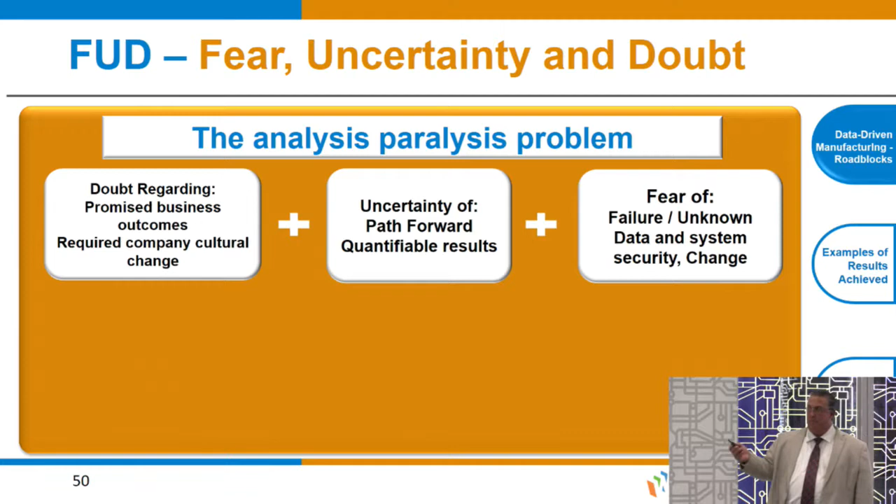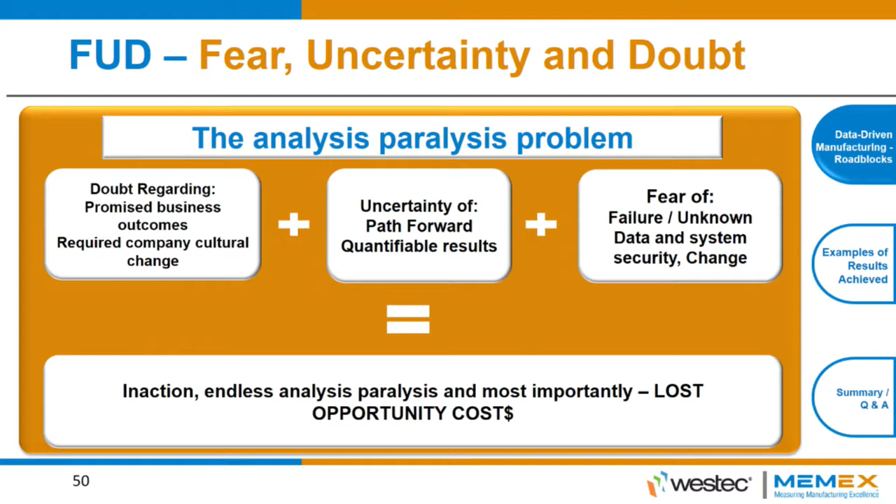But what happens when we add up the doubt and the fear and the uncertainty, we get what's called the analysis paralysis problem. Because if we don't take advantage of this technology, and if you believe what I said about a 4-month payback, 300% internal return rate, and we wait 2 years, we could have given this capital back to the company 6 times to redeploy to buy robots and buy new machine tools. So it's essentially tantamount to lost opportunity cost.

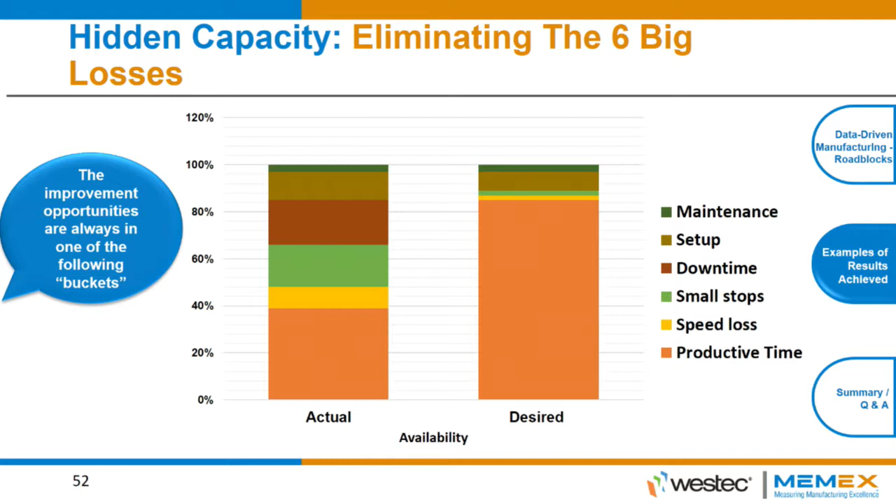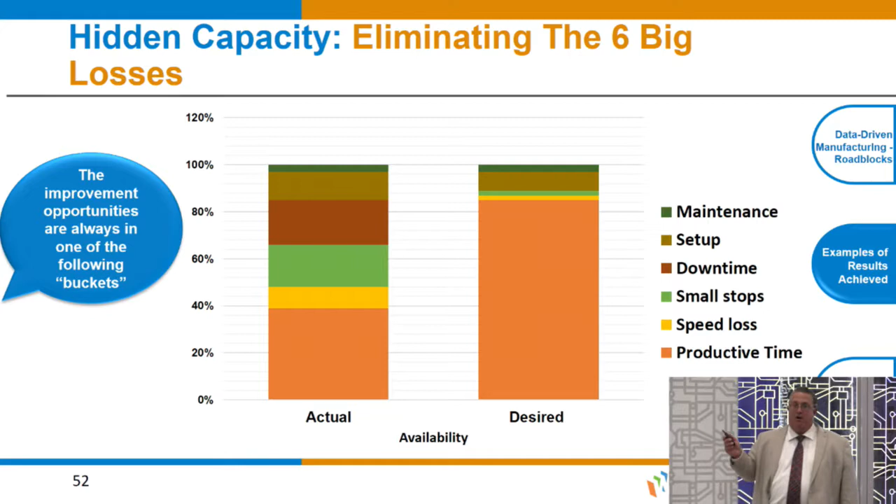Some examples of some results achieved. If we looked at the company on the left under the actual, I said sub 40%. The bottom orange block is the productive times, in other words, where we're actually in cycle and producing parts under program control. But then we have all these other time wasters or time stealers like maintenance mode, setup mode, downtime, small stops, and speed loss. The factory on the right is our desired state. We want to get that production time, we want to get that green light on under program control as close to 85% as we can get.

And it doesn't come from one thing. It comes from a whole keiretsu of small little process improvements. Things like reducing downtime, increasing quality, getting quicker to root cause analysis. Because I said there's 3 things in any factory that are constantly in flux. Labor productivity tracking. All these are like 1 or 2 or 3%, but they add up to a 10 to 50% productivity increase on average. All small little things.

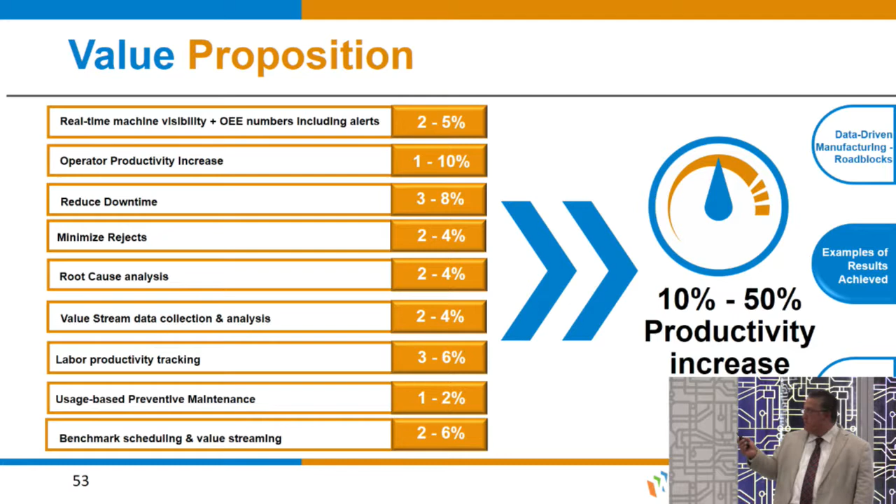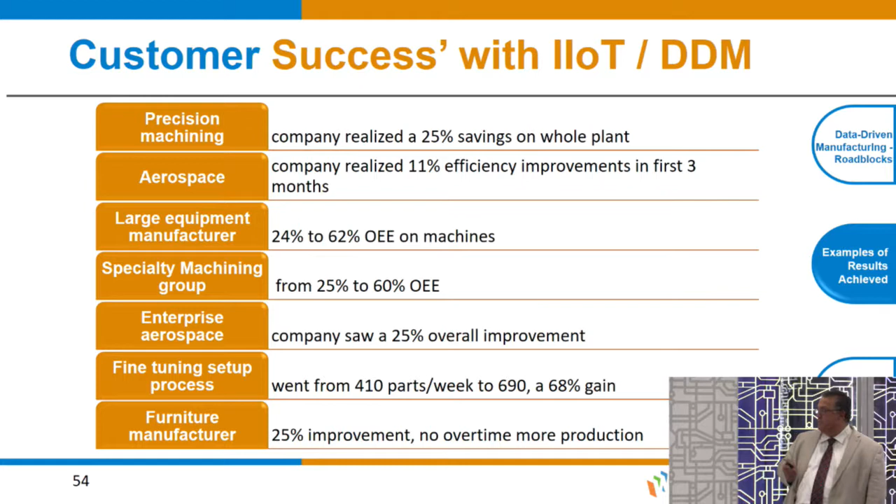Some of the successes, and I'm not going to read all these, but you can see that on the left-hand side, this applies to a wide genre of manufacturing. It's not just good for aerospace or automotive parts or whatever. We have a lot of industries represented here and a lot of compelling numbers on the right. Some cases 60, 65% increase.

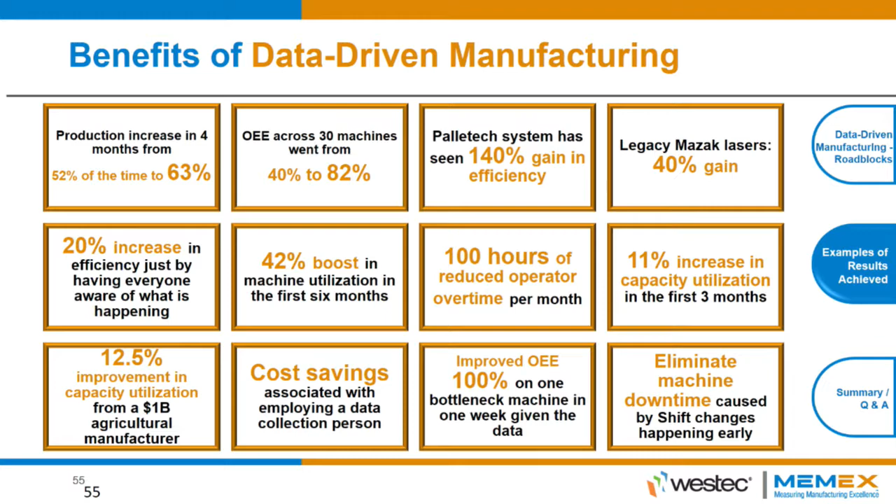And this is, again, a keiretsu of benefits that we've seen from customers that we've worked with, and not every one of those is applicable in every single case, but reduced operator overtime or increasing capacity utilization the first 3 months and on and on and on. Suffice to say, I'm sure that in your factories, 1 or more of these will be true. Maybe the numbers are slightly different, but it's definitely a delta from where you are to where you could be.

So my summary here is technology is available today. Why wait? It generates a very compelling internal return rate of capital that can be quantified. The why should always be the first point that you discuss with a vendor. It shouldn't be about the technology. It should be about the vendor understanding what it is you're trying to accomplish to make sure that the business outcome is aligned. The security, internet security has to be part of the discussion. If we just do this in an ad hoc network and something bad happens, it's horrendously expensive to fix, and we've seen it.